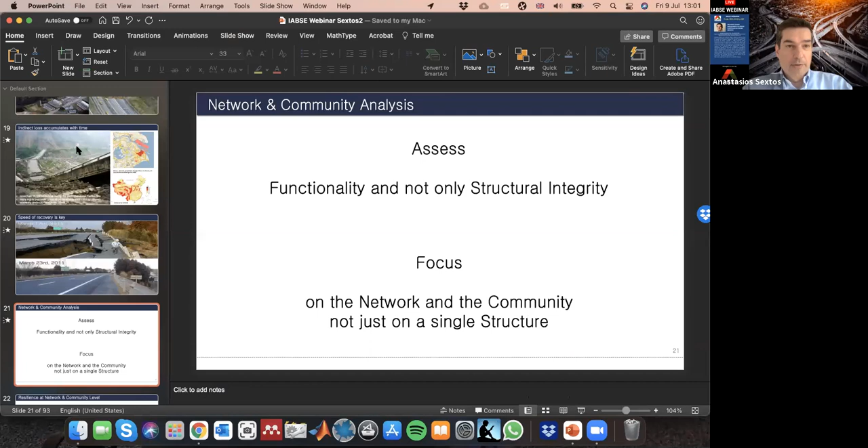So without further ado, after this introductory part, I will start sharing my screen and start sharing my thoughts about the topic we are about to discuss. But before I do so, I would like also to say a few words about the mission of the International Association of Bridge and Structural Engineering, which, as I said, is of course to organize this series of webinars, but that's not just that.

There are many other things organized by this very important international society, which aims to exchange knowledge and advance structural engineering knowledge around the world. This is done by bringing together people from academia, industry, the professional construction world, and the research sector. It's a very important association, bridging more than 2,500 members across 100 countries.

Most probably you're already aware of the very important Journal of Structural Engineering International, which welcomes papers from both academia and the professional structural engineering discipline. Feel free to go to the website and browse the content of this very important and interesting journal.

There are also other activities like national groups, task groups, focus groups, working groups and teams that work in different disciplines across materials, structural typologies, and other activities of bridge and structural engineering that are brought together in national group events and conferences. Of course, this was pre-COVID. Now we deal with webinars, but very soon we hope these things can continue in person so people can really discuss and interact with each other.

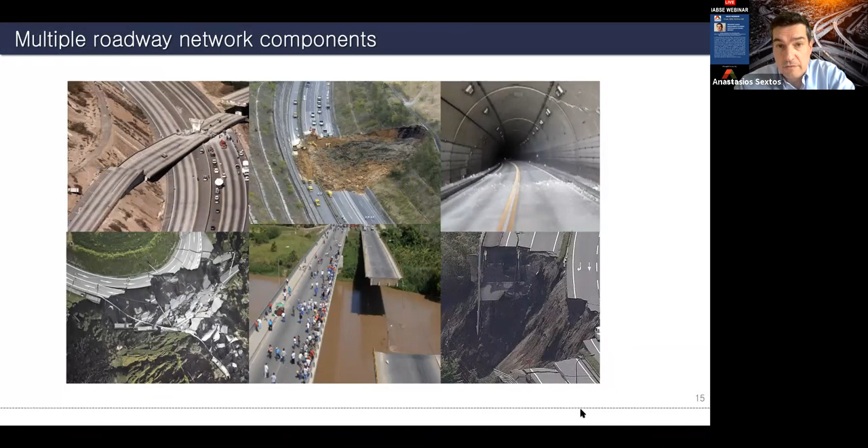Something else we know, based on previous experience, is that the direct loss of an earthquake can be very high, of the order of hundreds of billions, as the Fukushima earthquake has shown. But the indirect loss and cost of the earthquake can also be very, very high, even double in some cases. Because if the port is not working, if the airport is not accessible, if we cannot reach from point A to point B, if our services are down—like in New Zealand in Christchurch, where the whole downtown was out of operation for such a long period—then the cost is huge, and that's not directly related to structure or bridge damage.

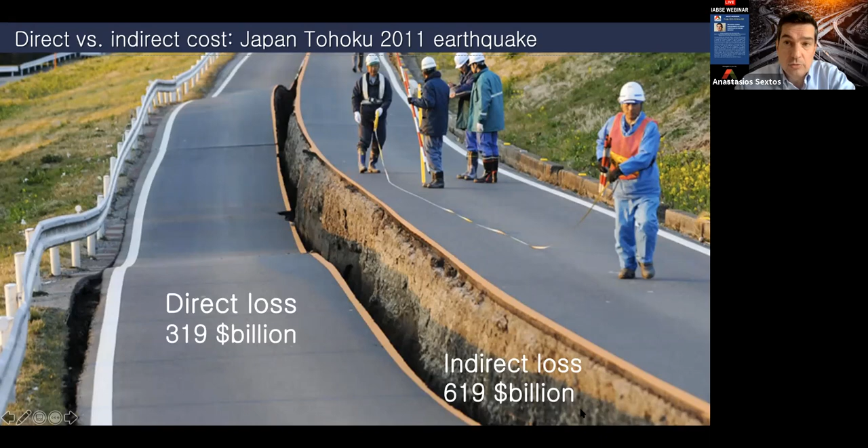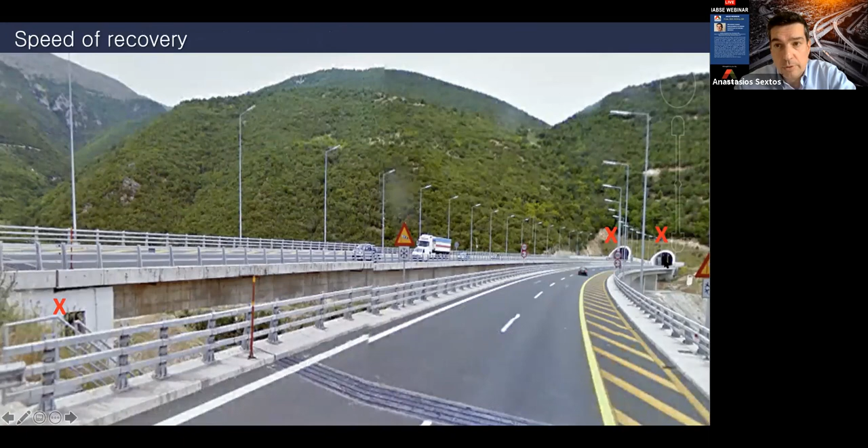Another thing we know is that the speed of recovery relates to the lack of functionality, but this is not really proportional to the extent of damage. The reason is that you can have a minor failure in the joint or at the entrance of a tunnel, and this is enough to take your bridge out, and actually the entire link of the highway, out of operation.

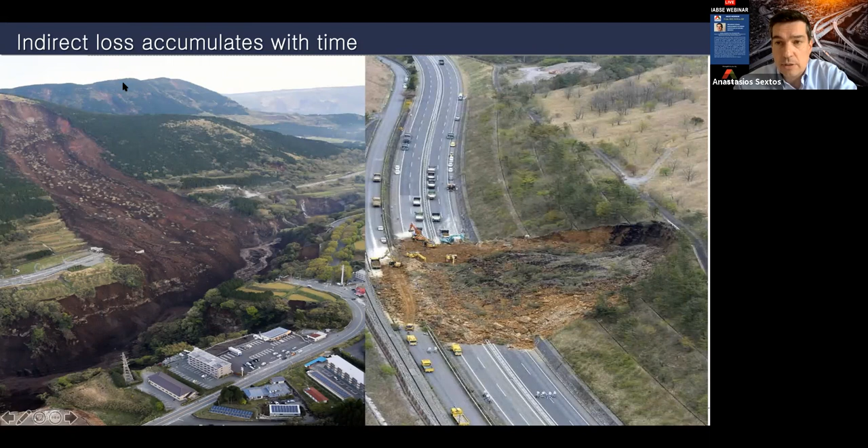Similarly, loss accumulates with time. Once the highway is interrupted, it can stay that way until it is repaired, and there is a huge cost in diverting traffic all around the area. For instance, there's a case where not only was there interruption of the highway, but the bridge also collapsed. So finding the closest bridge and doing the roundabout takes time, takes cost, and accumulates with time.

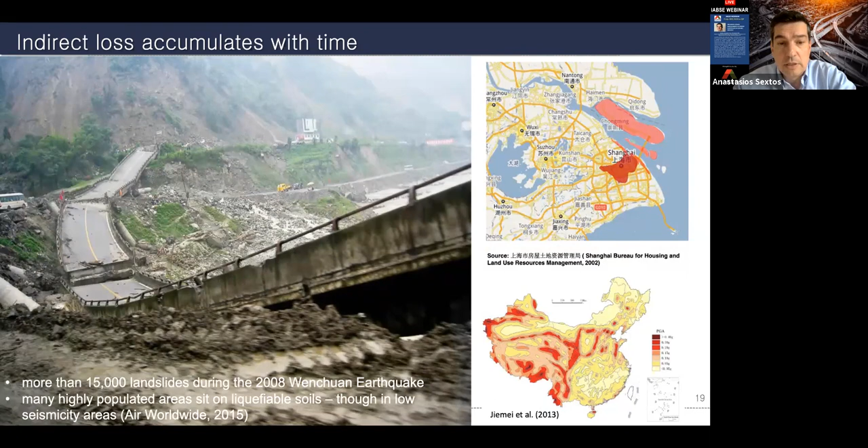Same thing happened in China, where landslides were actually triggered by earthquakes. That's a secondary effect of an earthquake, but high enough to trigger more than 15,000 landslides and create a very high loss. So recovery is key.

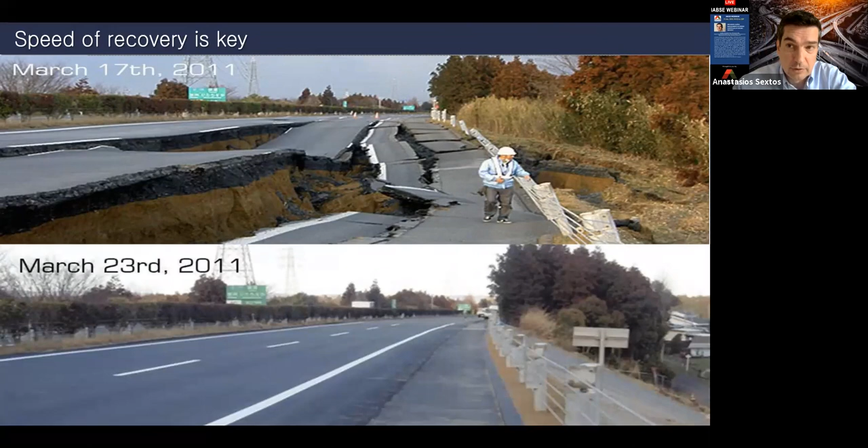Recovery can be quick, like we saw in Japan, where from the Fukushima earthquake on the 17th of March 2011, it took about a week to recover. But I can think of many countries where this would take way, way longer. So speed of recovery is very, very important.

Therefore, the purpose of this discussion is that we've now started thinking about and assessing the functionality of the system, not just the structural integrity—whether the bridge has damage or not. We also focus on the network and the community impact, not just the safety of a single structure. So in a few words, we're zooming out of the problem and revisiting the whole management of seismic risk.

And of course, this relates to resilience. Resilience, the most formal definition if you like, is the ability of a system to rebound, to restore functionality and social life after a major earthquake in the minimum time with a minimum cost. That's the definition that I personally like to use. There are many, many others.

Mathematically, this means that if your system was performing 100% before the event and then something happened, say an earthquake, your functionality dropped. Since then, it started recovering faster or slower. So how long it took to recover, and how deeply you failed such that it's harder to recover quickly, is really a very important question that needs to be answered.

And of course, how deeply, how extensively you fail is a function of aging, because if your bridge portfolio or components portfolio is old, sub-designed or substandard, this means the loss of functionality will be more significant.

Now, the challenges in doing so are several. First of all, how to quantify this? There are so many parameters that need to be quantified, because I'm personally very keen on defining resilience as much as possible based on numbers with a degree of uncertainty. And this is difficult because it relates to assessing social and financial impact that is not so easy to quantify. Structural damage is easier to quantify, and probably how long it's going to take to repair is easier to quantify too. Social and financial impact is not so easy.

And then we need to support informed decisions. So we need to calculate some numbers to help people make decisions, and engage with the professional community and stakeholders to make sure that our assessments, our numbers, our predictions are realistic enough.

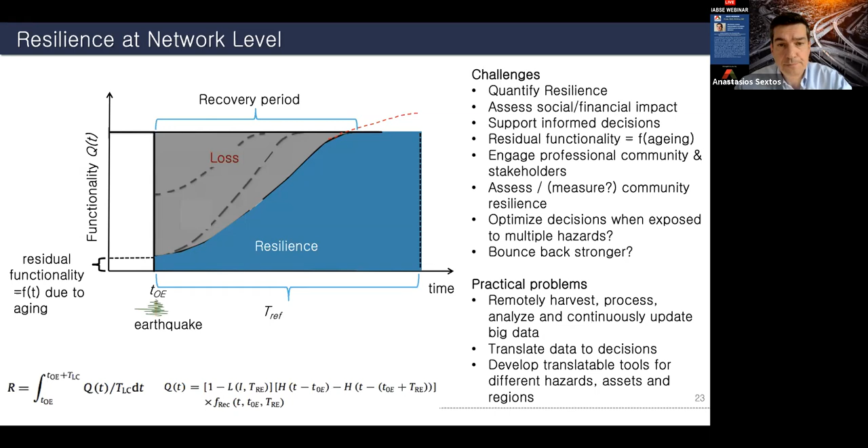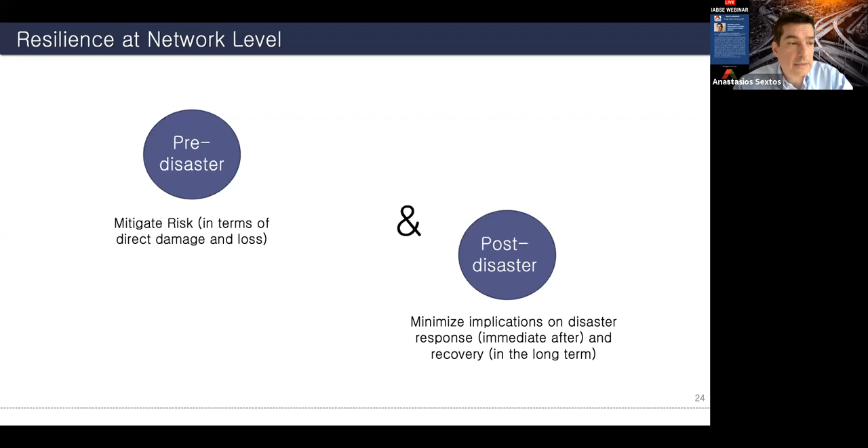With that, there are two ways to deal with it, two levels where we can intervene. One is before the earthquake event: we assess how much this risk is for the network level, and then try to do the best strengthening, or change our policies, before the event. Or after the event, which is post-disaster management, by minimizing the implications on disaster response and making our recovery schemes more successful.

Who cares about this? Of course, that's another question. Is this just an academic question, an opportunity to present slides in IABSE webinars and write papers? Well, that's not true, because we're talking about risk and loss, about funding, and this means somebody always has to pay the bill. So the entity that has the responsibility to bear the risk and pay the bill has to be interested in minimizing this risk and reducing this bill.

The state is one standard option in most countries - responsible for direct repair cost or indirect social cost. And maybe the highway stakeholders - in Central Europe we know many portfolios of structures and bridges are privately owned and maintained. So this is the entity that has the risk.

The insurance cares, because that's how premium is defined. And also the entities that pay the premium care, because they don't want to pay such a high premium. So this is a huge discussion. Therefore, quantification of seismic risk is so important.

That's about pretty much what I'm going to present to you. So instead of just showing a methodology that we have developed, I'm going to show you directly the results of a case study, so that through these results we can understand how our methodology is working. It's not the only methodology - there are other ways to deal with things - this is just to inspire you mainly.

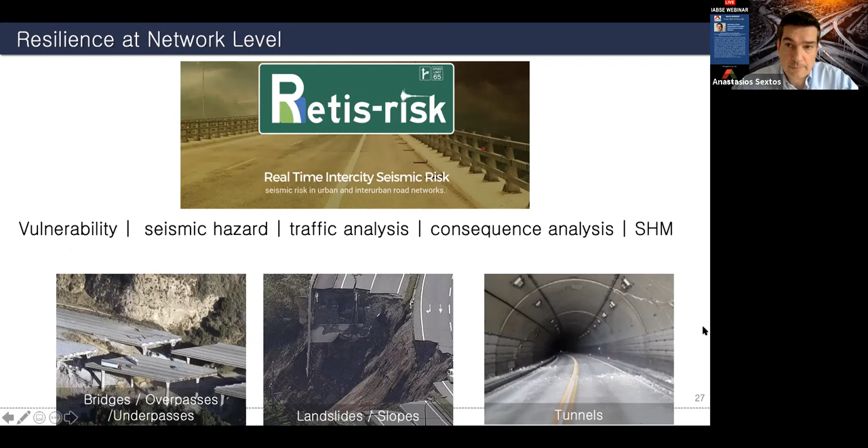But this particular methodology has been defined through a research project entitled RETIS-Risk, real-time seismic risk, and it deals with the convolution of vulnerability, hazard, traffic analysis, consequence analysis, and structural health monitoring, considering multiple components of the network system.

I'm going to take you virtually into Southern Europe, Southeastern Europe, and in Greece in particular, where we'll be dealing with a highway in the north of Greece called the Egnatia Highway. The interest about this highway is that it's a former Roman path, if you like, that has a number of bridges. That's a snapshot of the Roman path.

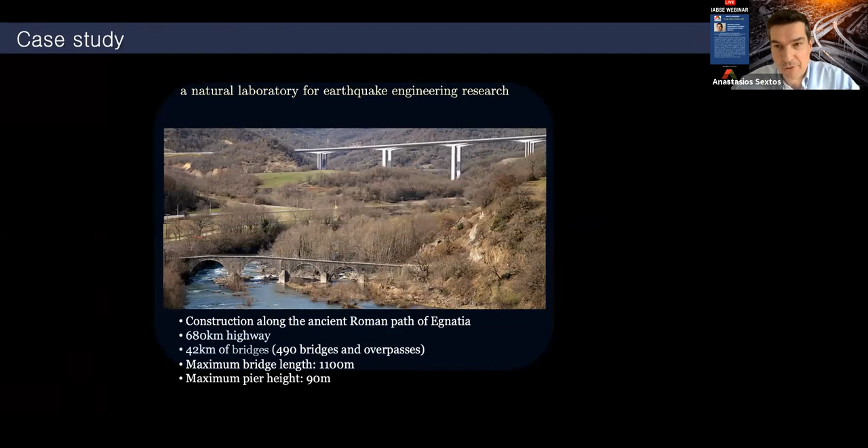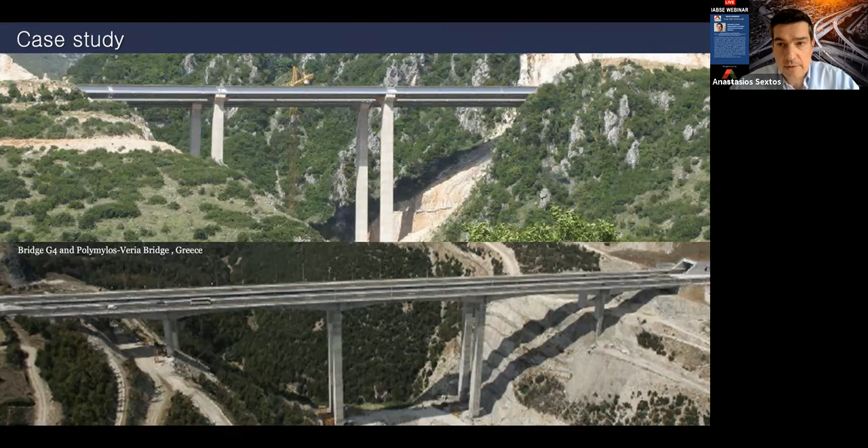That's how the bridges look. It's not always so close, the ancient and the modern path, but it's a nice photo, that's why I tend to use it. The importance of this comment is that there are many important structures in an unfavorable topographic environment, quite exposed to seismic hazard. The design PGA in the region is between 0.16G to 0.24G, so that's not negligible.

Challenging structures, and this is where we try to apply our methodology first. So I will be talking about the methodology and the case study and the software we developed all in one, so we see the example directly as we speak.

But in essence, the methodology effectively splits different stages of things that need to be convoluted. First, we need to map the network in terms of its topology, the structural portfolios we've got, the other components we have, what types of structures exist, where they exist, and how they interact with the traffic within the network.

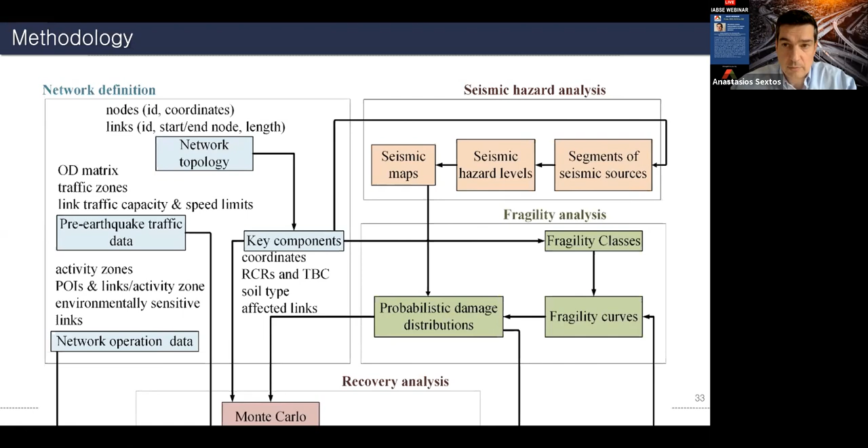We have to map and quantify seismic hazard, and then map and quantify vulnerability and fragility of our systems. And then we have to work with traffic analysis and see if one of the structures fails with some probability, what's going to happen, how this traffic is going to be diverted, and how long will it take to recover, and so forth.

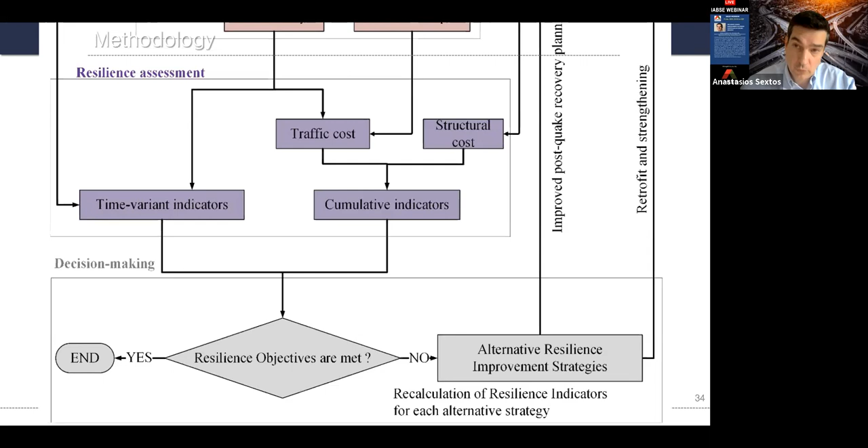So we set some resilience objectives from the beginning, assuming that we are the stakeholders of this entity. We say that, okay, in case of an earthquake with a 475 year return period, we will not accept the highway to lose functionality by more than 10% for more than 15 days. I'm giving you an example of a resilience objective. That's not a loss objective, how much it's going to cost to recover. It's a resilience objective: how long it's going to take, how much it's going to cost, and what it will take to restore full functionality.

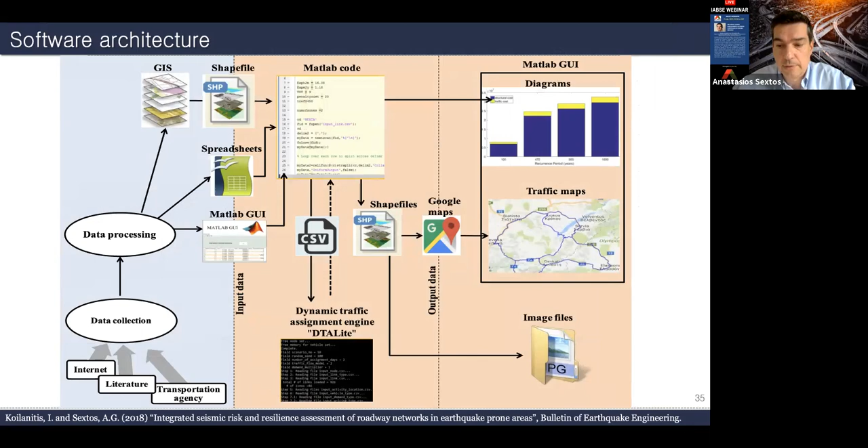That's a software we have developed, basically an integration of GIS and MATLAB that runs all the Monte Carlo simulations. This is how, for example, we would split a highway network area into different components like highways, roads, bridges, tunnels, slopes, and other joints, main cities, points of interest, things with higher impact. If you have a very important industry in the region, it gets a very high weighting factor to retain its accessibility, for instance.

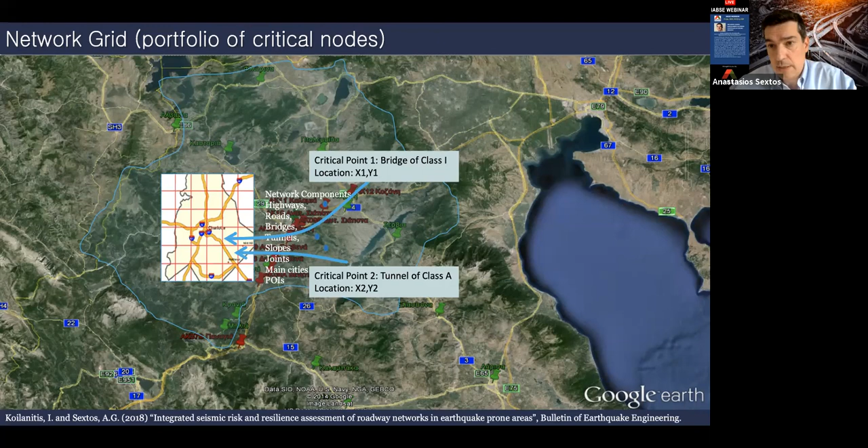And then these critical components are split into joints. These joints are points on the map indicating that they can interrupt traffic within the network. That's the purpose of these critical components, critical nodes in the system.

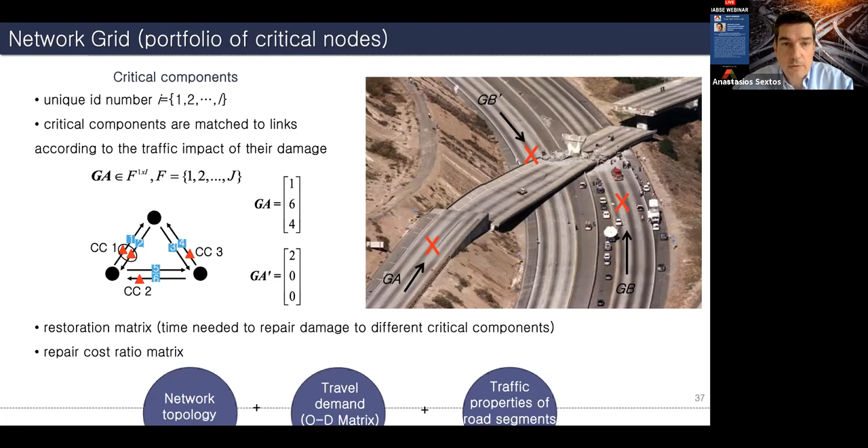We also integrate the travel demand origin destination matrix. So clearly the stakeholder of the highway knows what is the standard traffic on standard days, going from point A to point B and from point B to point C in a matrix, or at least the average values. This is also imported into the system.

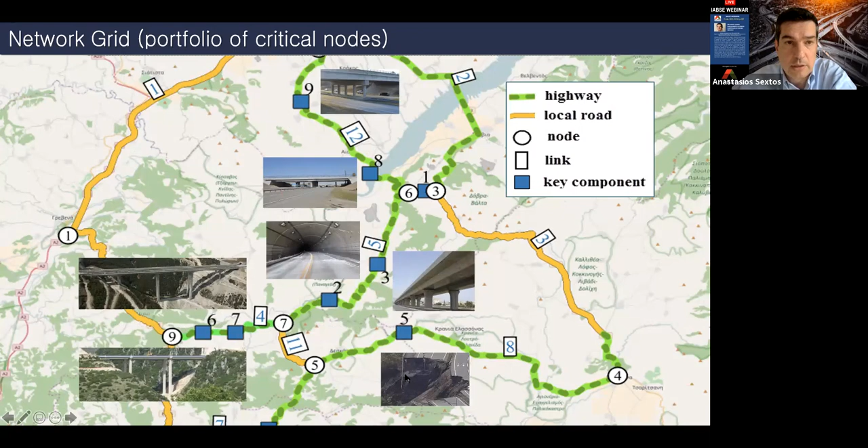This is pretty much how it looks like. You've got the traffic, you've got the GIS map of the highway. That's the simplest version of the example I'm telling you so we can understand a little bit better. Bridges are mapped and classified, tunnels the same, and everything else, slopes that can probably pose a threat to the functionality of the network. That's how it pretty much looks like.

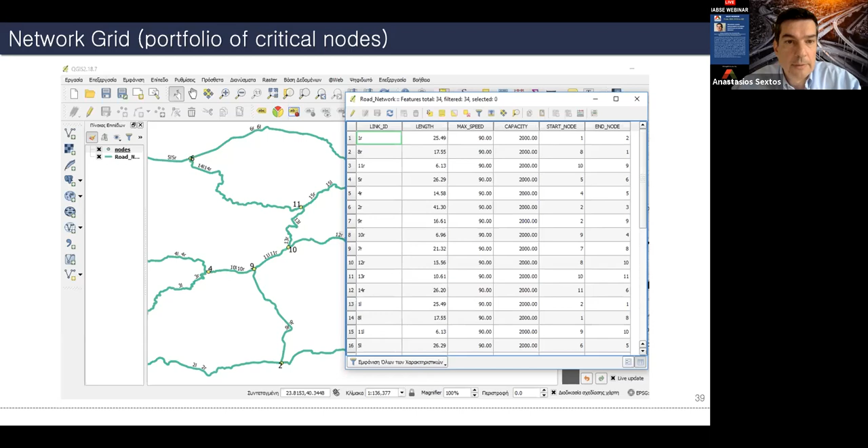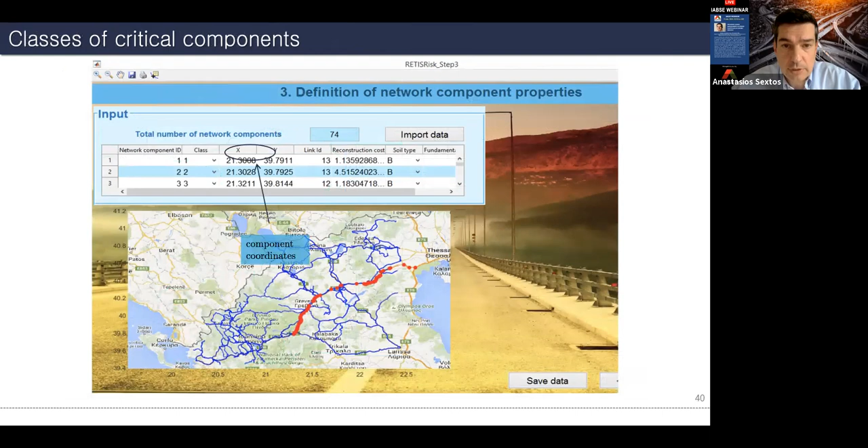I have to say that all the software runs with freewares. We are not using any professional software. It's using QGIS, but it can be integrated with ArcGIS, for instance. And then, of course, we need to define the networks of the map. That's how we can see them through the system, where they are, what is their class, what is their coordinates, reconstruction cost, soil type, fundamental period that we're going to use later on, and so forth.

We also need to define seismic hazard. Seismic hazard in this case is tricky because it is not the convolution of the probability of experiencing an intensity measure due to exposure to different faults at a single point. We are effectively talking about the spatial distribution of the intensity because of a single rupture every time. It has to be scenario-based because for a different location and a different fault that is rupturing, there is a different distribution of seismic intensity and therefore different probability of different bridges and components to fail.

So every rupture has to be dealt with separately, for different annual exceedance rates that can be applied in different rounds of analysis for different seismic faults and also for different segments of a fault, because a fault has a length of kilometers. Whether you're in one part of the fault or the other would make a big difference if there's a bridge around. So we're working on a scenario basis, and then everything is integrated in a Monte Carlo scheme at the end.

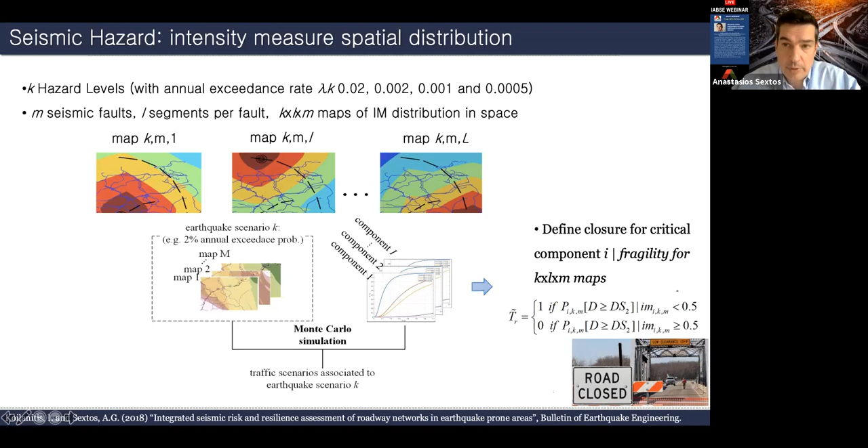So you can see that we generate a number of maps of spatial distribution of seismic intensity for different hazard levels, for different seismic faults, to predict the failure of different structural components, and we end up with the probability of each bridge closing for a given event.

Once we do this, or in order to do this, we need to know the seismic fragility of the bridges. Seismic fragility, in short, for those not very familiar, is the result of a very detailed nonlinear structural analysis under earthquake loading that will give something like the figure on the right, which is a probability to exceed a certain damage state, let's say minor damage, moderate damage, high damage, collapse, versus an intensity measure of the earthquake, such as PGA, spectral acceleration, or some other more complicated intensity measures. And by knowing this probability, we integrate that into the system.

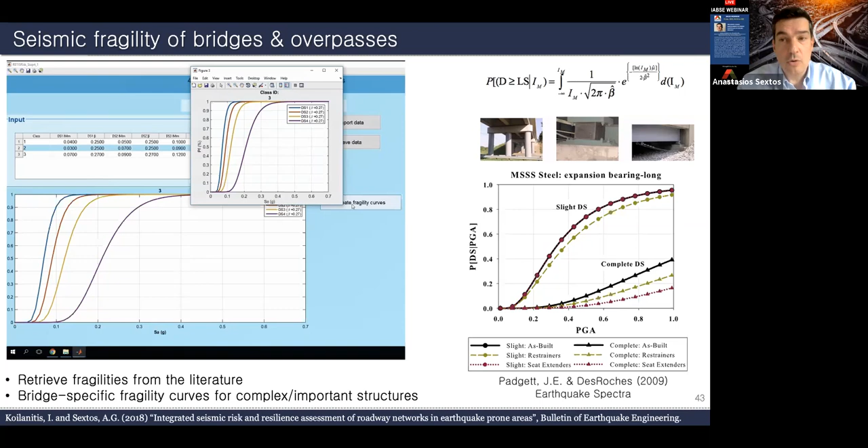So we classify all bridges that have the same structural typology, therefore the same fragility, and given the location they are in the map and the intensity at this specific location, the system returns back for every analysis of the Monte Carlo scheme the probability for this bridge to have minor damage, therefore closed for X number of days, or moderate damage, therefore closed for Y number of days, and so forth.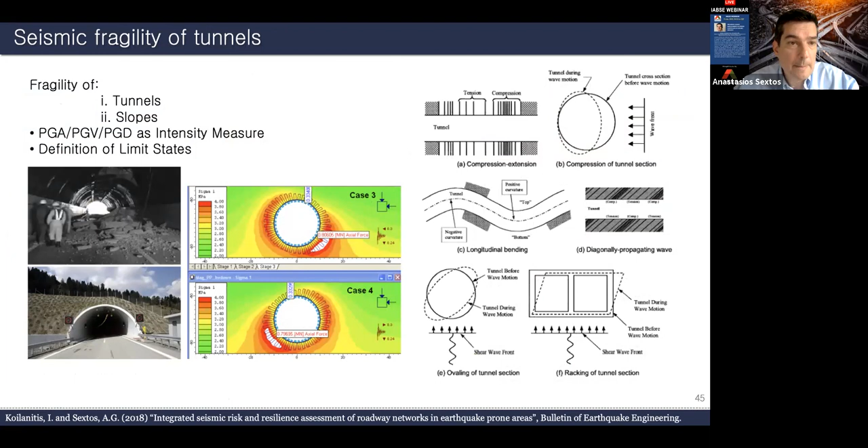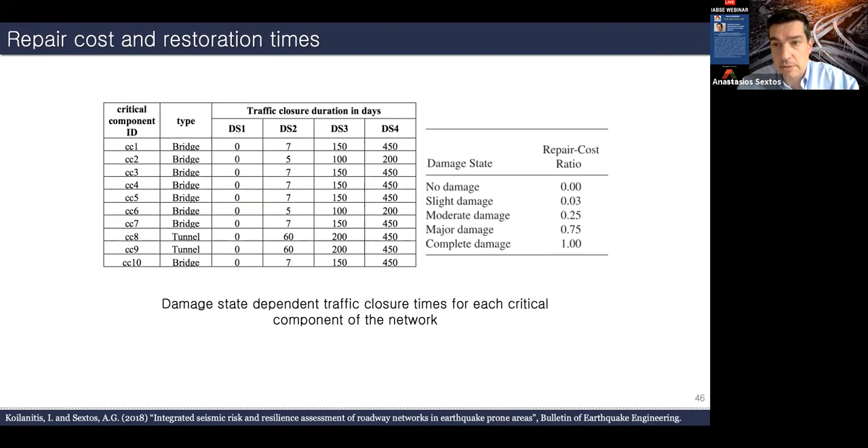But there are fragility curves for that, and we have introduced them into the system. And then, of course, the software would like to know how long it's going to close each structural typology if it experiences a certain degree of damage. That's also information that's in the system.

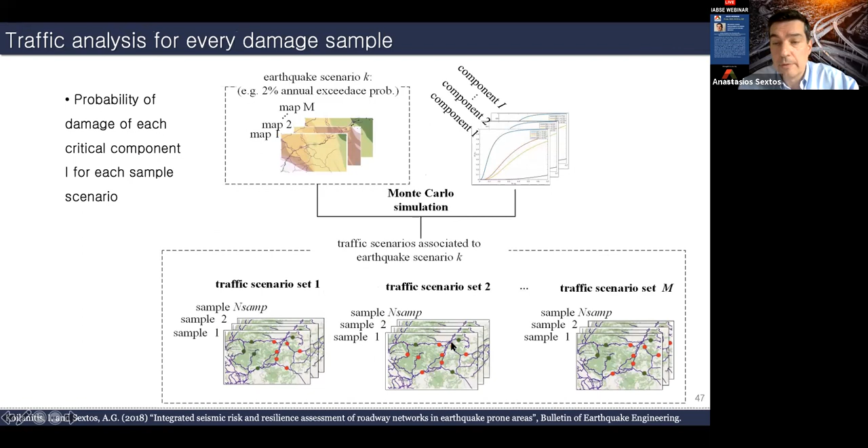And then Monte Carlo analysis will convolute everything with everything in a repetition of analyses, as you can see, different traffic scenarios, different maps, different cases of structures that close the highway, and so forth. This, therefore, will lead to the traffic analysis, because once, for one scenario, two bridges are closed, then there is another software that takes care of the redistribution of the traffic load and calculates the extra time needed for people to drive around and take another alternative route.

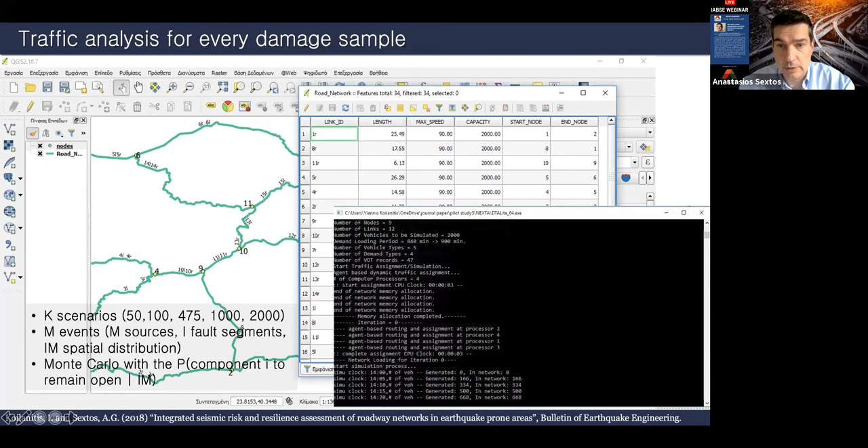So this is something that is repeated multiple times, again and again, and it's also repeated for recovery phases. Because once there is the initial state of damage, then given the repair rates and the duration per damage, per structure, per scenario, we end up with a virtual time that is running, and after 3 days, 1 bridge opens, so we need to rerun the state of the other bridges and the redistribution of the traffic scenario, and so forth. At some point, which is when we end up with full functionality, everything is green again.

But until that, for every stage, we need to repeat the redistribution of the traffic and accumulate all this cost. So this cost, of course, comes from defining an importance function per different highway link based on how much traffic they were carrying before the earthquake. And then we calculate the repair cost ratio index to accumulate how much it costs to repair these bridges depending on the damage state.

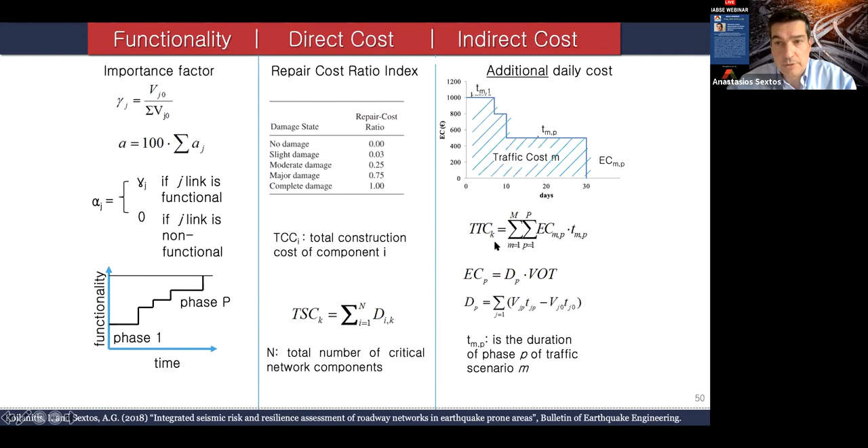And of course, how much is the extra traffic cost because people need to drive further, drive for longer, and so forth. And that gives us the final result, or the final prediction, if we do that before the earthquake, which effectively is explaining the following.

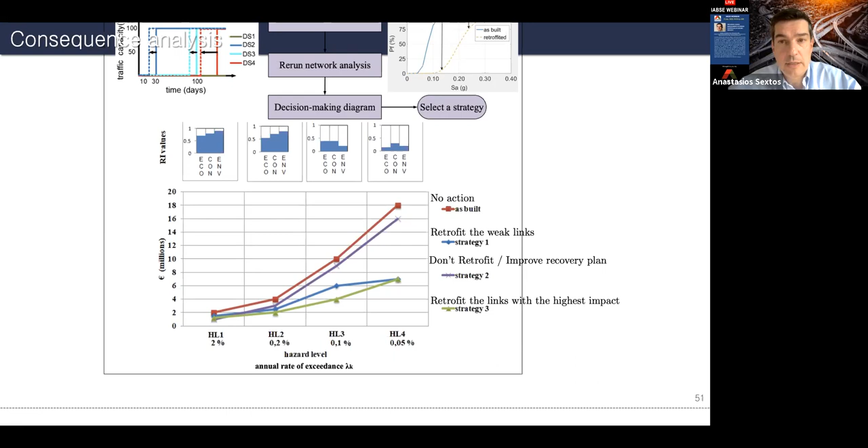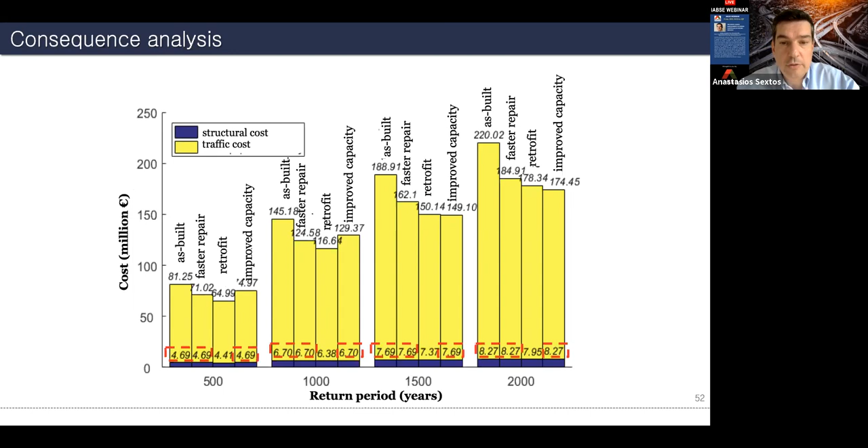And one of the things that we need to answer is, if we know these numbers in advance, would it be better to retrofit now, or do we just play dumb, do nothing, and wait for the main earthquake to happen, if it happens?

This is what I think our comprehensive approach answers, because the stakeholder might take the risk either to do nothing and retrofit nothing, or if it's obvious there's going to be a very high loss of functionality and cost down the road of the life cycle of the network, it's much better to pay now, let's say 10%, compared to the total risk of paying 10 times higher cost if a major earthquake happens. This depends on the properties of the portfolio. If there are many old bridges in the system, it's way better to invest money now to retrofit, and of course retrofit the ones with the highest resilience impact, not just the weak ones, instead of waiting for an earthquake to happen.

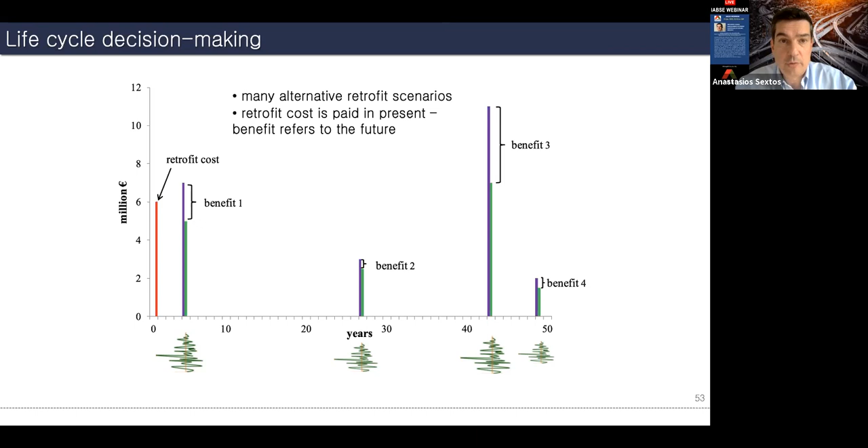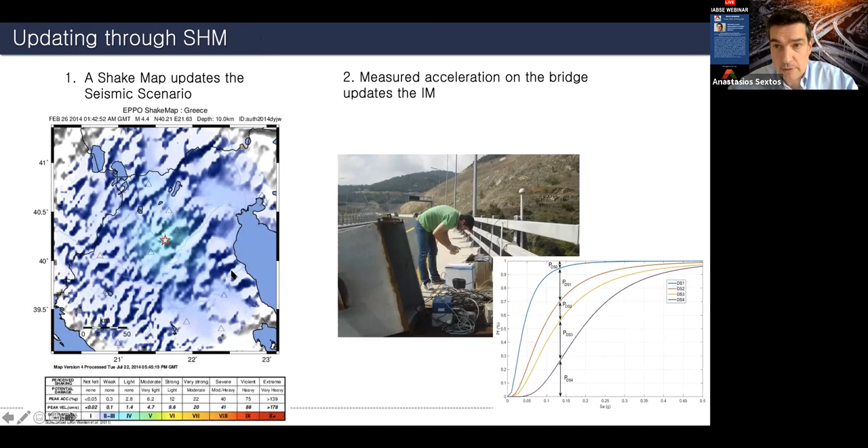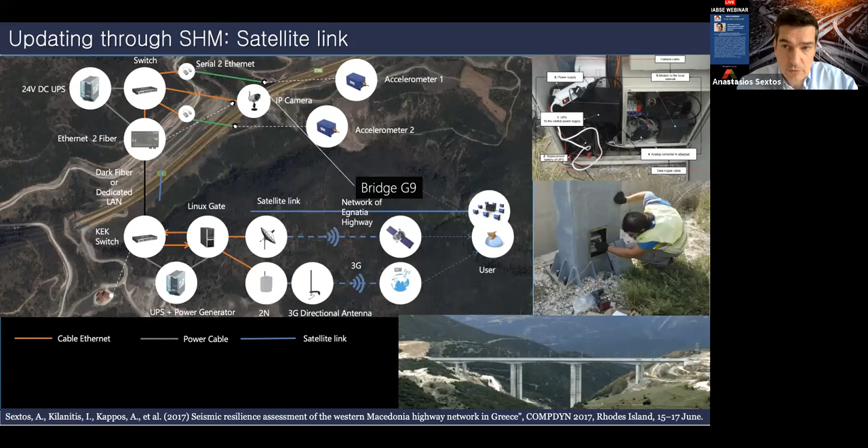Final thing I want to show before some uncertainties of the system is that we have improved this by introducing structural health monitoring in some of the bridges, because right after an earthquake we have a shake map, reducing the uncertainty to zero about the seismic intensity in the system, since we know that in about 5 minutes. Also, by introducing a satellite link—why satellite? Because typically after an earthquake standard GSM connections may not be working, so that provides redundancy. Through that we get structural response and measurements from the bridge, on the bridge, next to the bridge, free field measurements and on-structure measurements, giving information about the intensity the structure experienced.

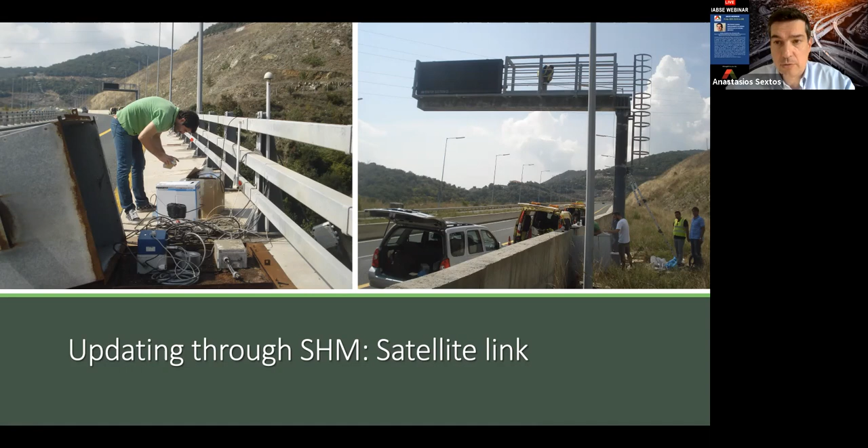With that in hand, because we know the intensity and the spectral intensity the structure experienced, we can very quickly after an earthquake predict if there is damage and if it's worth checking this bridge versus another, simply with our stakeholders using the satellite connection before going to check the bridges on site. Now, a few uncertainties I'm going to share.

I'm not going to go into the mathematical detail. You'll see some equations, but I'll skip those—only physically, I'm going to share some information with you.

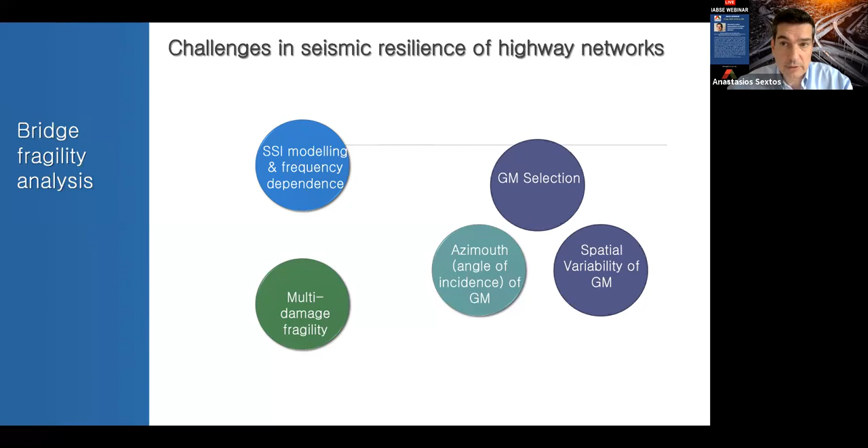The second thing I'll share is a series of uncertainties I'll present qualitatively, because we're talking about loss based on probability of failure, and this probability of failure depends on fragility of the system, which requires very detailed analysis. There are some very important uncertainties in the analysis of the system.

One: what is the stiffness of the abutment embankment system? This defines the boundary conditions of the very system we are solving. I won't get into full detail, but it's key to understand that the gap we've got, ratcheting effects, nonlinear response of the abutment, amplification at the abutment level—these amplify and entirely change both the dynamic properties of the system and the input that goes into it.

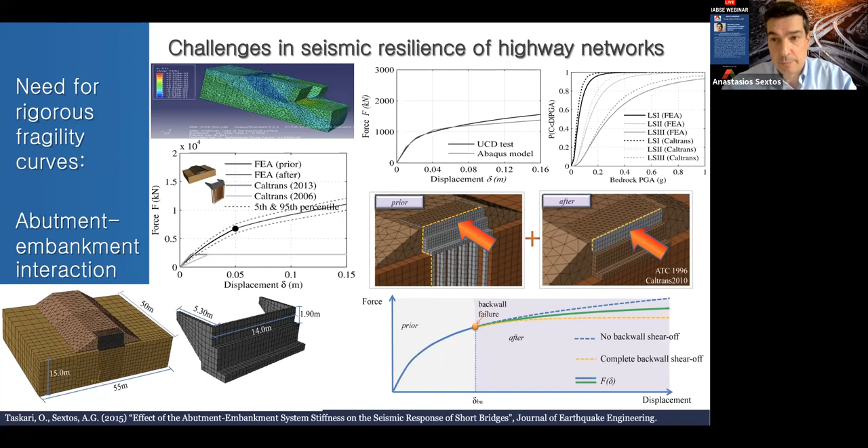One major uncertainty. The second major uncertainty is that soil structure interaction is not just a spring—needless to say, certainly not a fixity at the base of our structure. So we have developed systems, which you can refer to in the presentations, where we introduce a series of lumped parameter models, combining springs and dashpots optimized to mimic the impedance function of soil structure interaction, so that at least the frequency dependence of soil structure interaction is accounted for in an analysis in the time domain. This is really very important to account for.

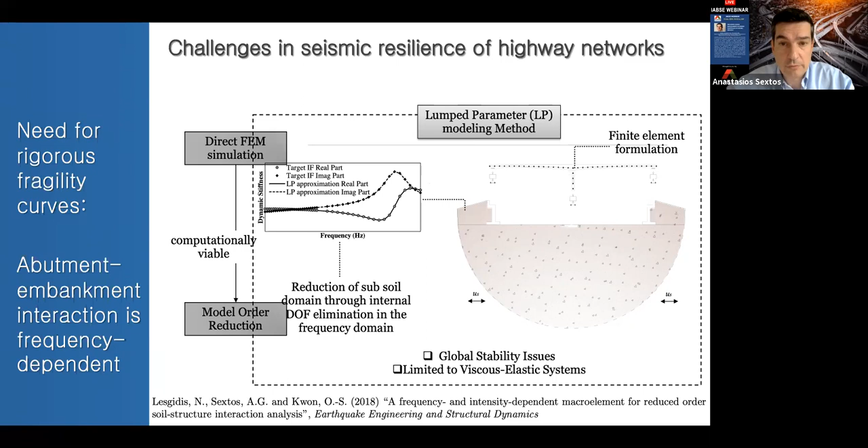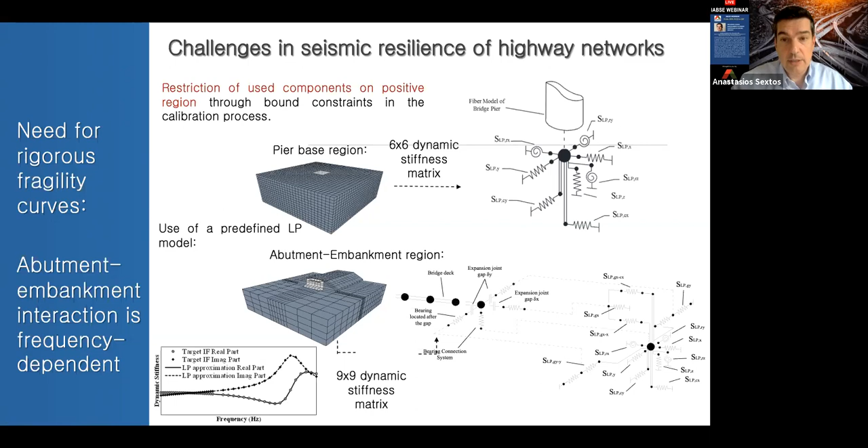We can see an example here. If we were to model such a complicated 3D pier-foundation system or abutment-embankment-subsoil system, this is effectively replicated with a series of springs and dashpots that follow the impedance function and provide the frequency dependence in damping in particular, because different properties of the system and the earthquake lead to different soil structure interaction damping, and this changes the results of the system a lot. That's how our finite element model would look. We also have software for that, so springs and dashpots can be implemented very easily—this is something people can use in practice.

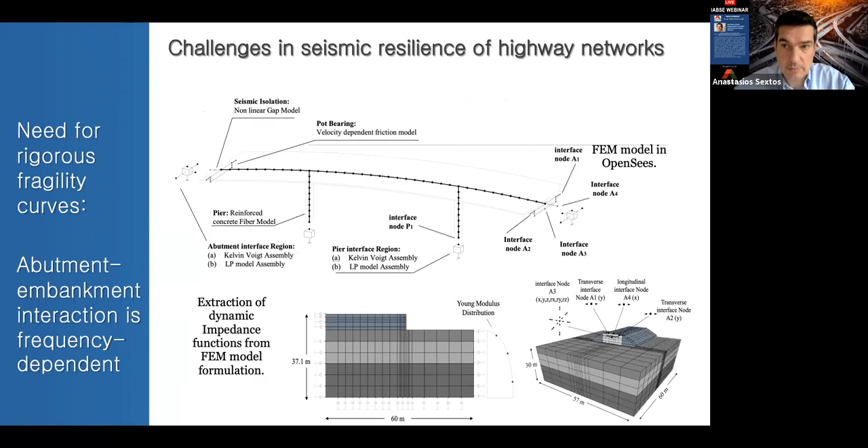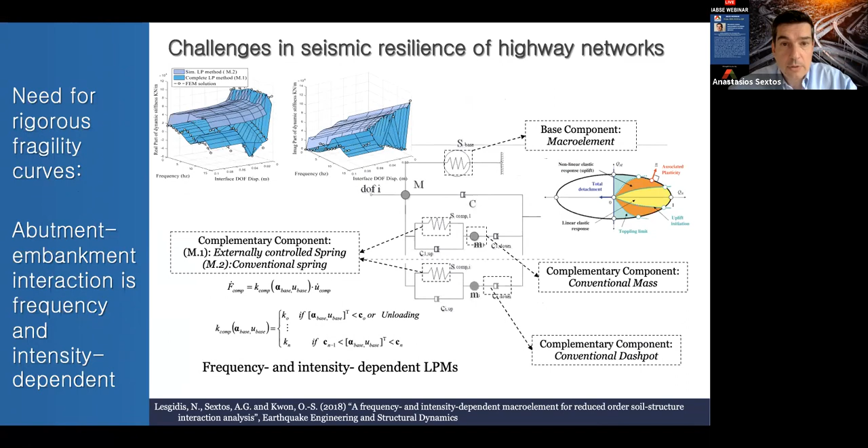We have also introduced a plasticity model into the system, so that we take into consideration that when the soil response is nonlinear, this frequency dependence is further modified, and that can be captured as accurately as possible. With this analytical formulation, we're able to capture very well with springs and dashpots something that normally would need a large soil domain and a very heavy finite element model.

Talking about fragility analysis, this requires introduction of uncertainty, and repetition of thousands of analyses. So it makes a great difference if we can reduce the computational cost with a very accurate yet very computationally effective set of springs and dashpots.

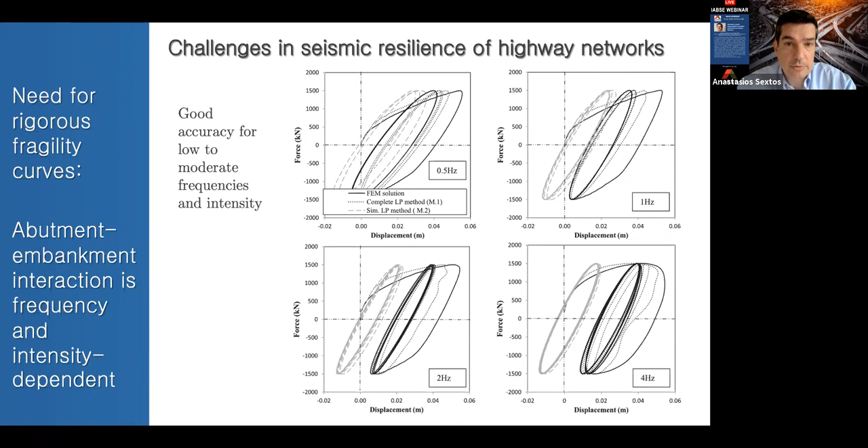In some other cases, for different damage states, it can even be 100%. So we are predicting collapse. We're working to calculate the loss of a system, and we have lost 100% of accuracy because we forgot to include, or didn't include properly, one important physical aspect. That's my degree of warning here in my analysis, that I zoomed in a lot initially, saying okay, everything has to be zoomed out, we need to integrate numbers, we need to quantify. But at the same time, for things that have a disproportionate effect on what we calculate, we should actually do them properly.

A similar type of issue is the fact that fragility or damage has multiple forms, and it's multi-angle. Because when we have a bridge failing during an earthquake, we can have shear damage of the piers, flexural damage of the piers, we can have the abutment bearings failing, we can have the abutments tilting, we can have pounding, probably foundation problems. There are many, many different types of damage.

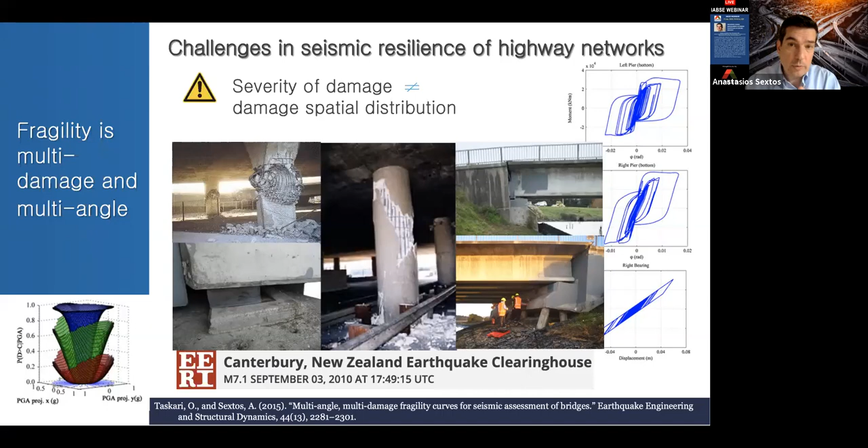So depending on what damage mode we're looking at, clearly the angle of the principal component of the ground motion, which is really random and we don't know in advance, can play a major role. So we have to account for randomness in the angle of incidence. We have to account for different damage modes before we end up with a fragility and an estimate of how long it's going to take to recover from a degree of damage.

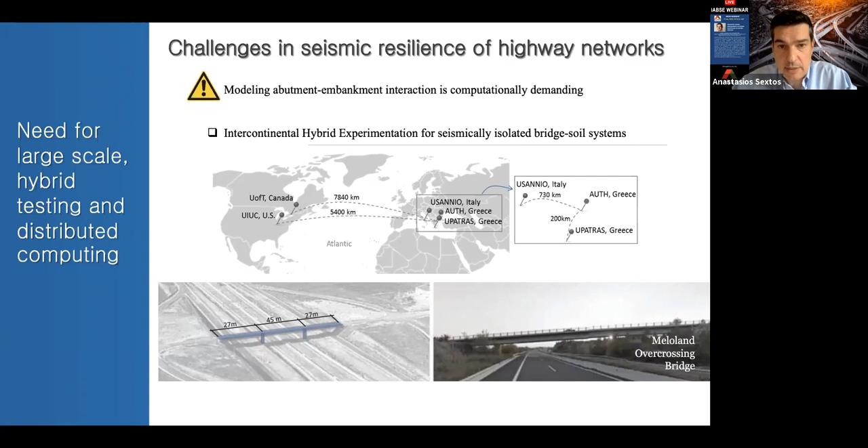That's also a set of slides that relate to the need for doing large-scale testing, because we are relying very much on numerical analysis. For some important structures, particularly substandard structures and old bridges, it is very important that we have the ability to use experimental data. So I'm going to give you an example of how we have performed hybrid testing.

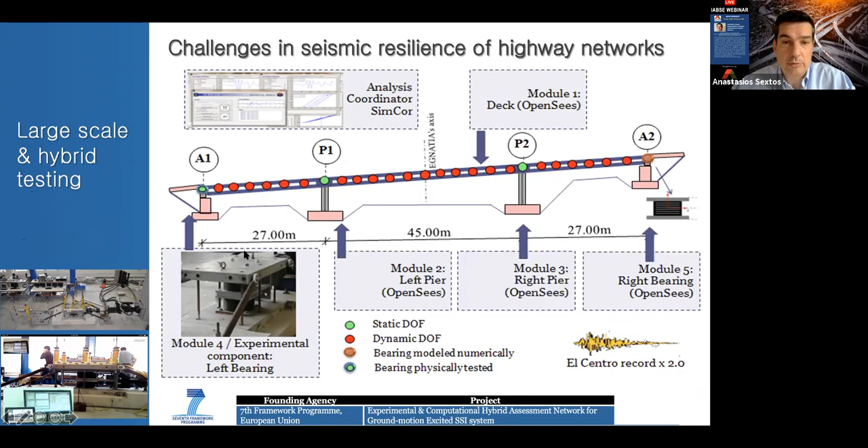Why I refer to hybrid testing, not just component testing, is because this gives us the opportunity to run the system as a whole by substructuring into numerical components run on several computers, or in several different countries in this case, and some critical elements that are rate-dependent which we would like to test experimentally, simultaneously.

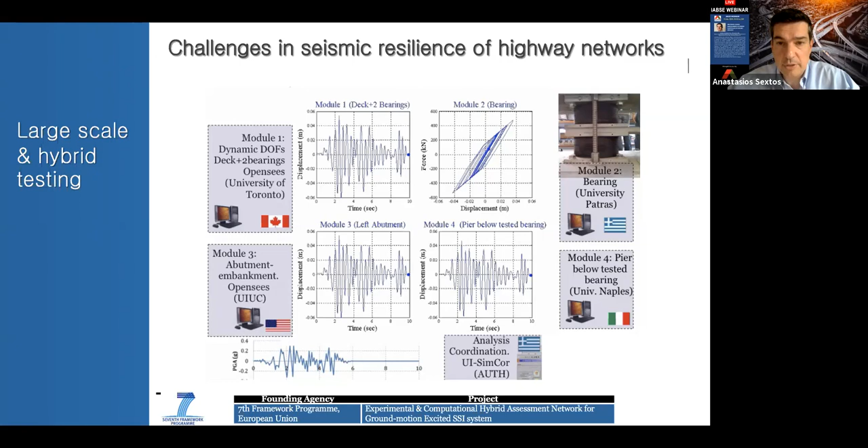Things that we can't model, we test. Integral abutments, for instance, soil-structure interaction, pounding, impact on stoppers, nonlinear response of substandard bridges, and so forth. Testing, testing, and testing is very, very important. Talking about testing, that's another example of a project we ran at the University of Bristol.

This is just to show you things that can be done at scale, combining soil-structure interaction on systems that include the soil and the bridge on the shaking table, so we can shake them and measure what's happening behind the wall.

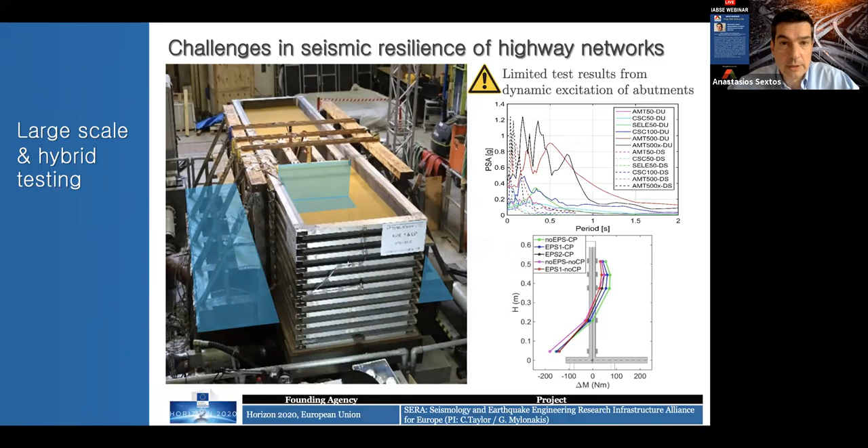Currently we have a much larger test at the new lab at the University of Bristol, where we'll be measuring within a soil pit of a large dimension, about the size of a room, what the passive pressures would be in the system during loading. This is also something I've discussed previously about multiple angles and multiple damages, implementing the stiffness and damping properties we have accounted for experimentally.

These are all very important aspects, and something I'd like to share with you ahead of recent work we've just accomplished: when you couple experimental and numerical work, multiple damages, multiple angles of incidence, different properties, and uncertainty in all elements of the bridge's response under earthquake loading, and convert everything to money, to loss, to cost, you'll see that these results not only differ depending on the angle of earthquake motion, but the stronger the earthquake is, this tends to disappear.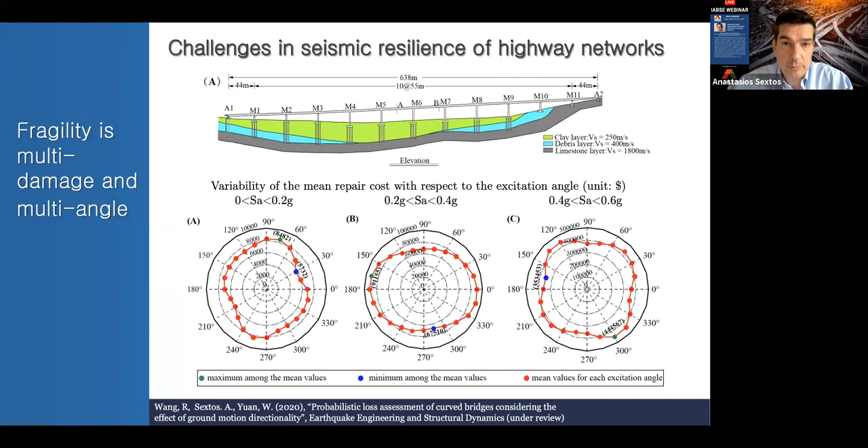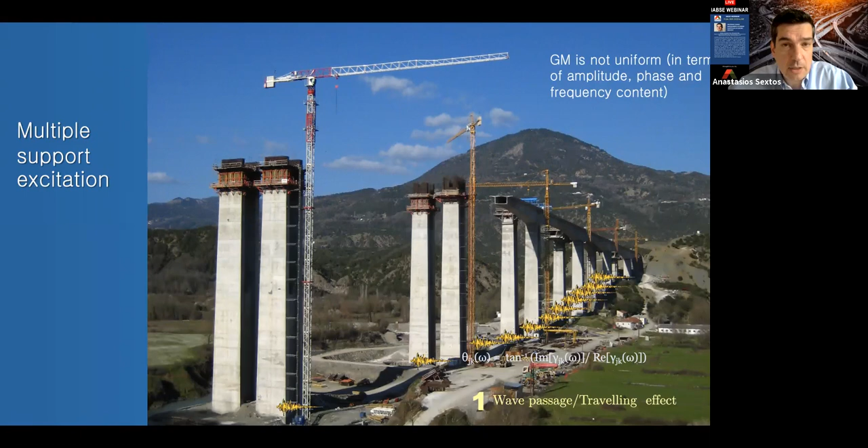And these are some further examples. A final thing to keep in mind when talking about bridges is that ground motion across the bridge is not the same. That's easy to understand, because ground motion naturally changes in amplitude, phase, and frequency content, simply because waves travel and meet different soil profiles, and they reflect, refract, and are superimposed. The difficulty is how to calculate that and take it into consideration in a design or assessment process.

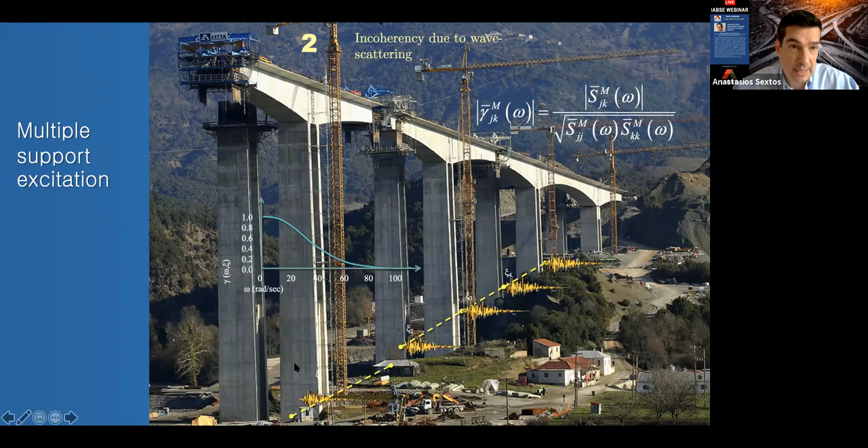As we see in this slide, the seismic motion loses its coherence, its statistical correlation, from one point to another. This curve shows that the coherency of motion drops with frequency and with distance. Similarly, different soil conditions or site effects—1D, 2D, 3D, topographic effects, and so forth—lead to ground motion that differs from one point of the bridge to another. Crossing a liquefiable soil profile is the same.

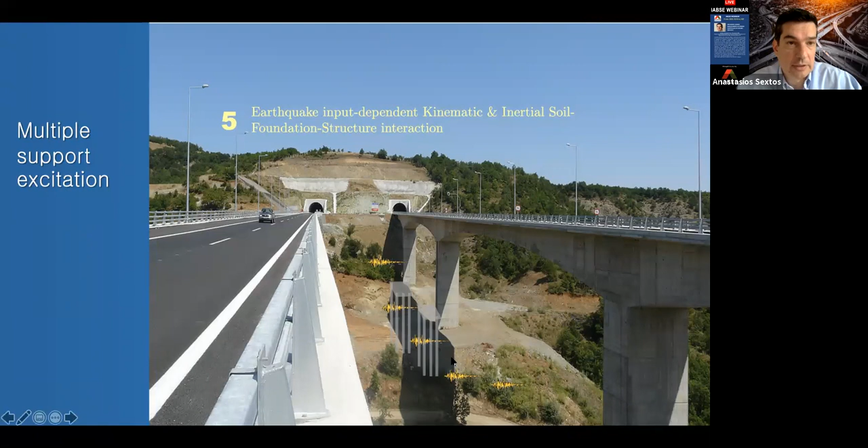You have significant soil-structure interaction within some of your piers as well, because soil-structure interaction changes the frequency content and phase of the ground motion wherever the soil is substantially different and softer. Therefore, all that combined leads to cases where the ground motion at one location of the bridge and at another location is not just delayed in time—it is very, very different.

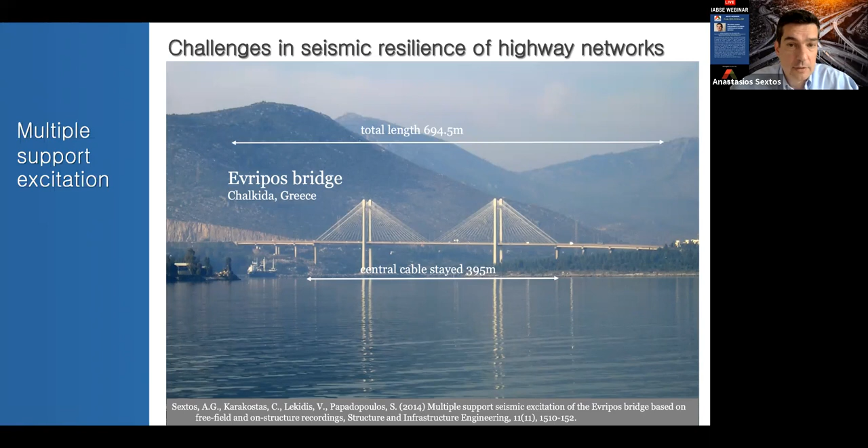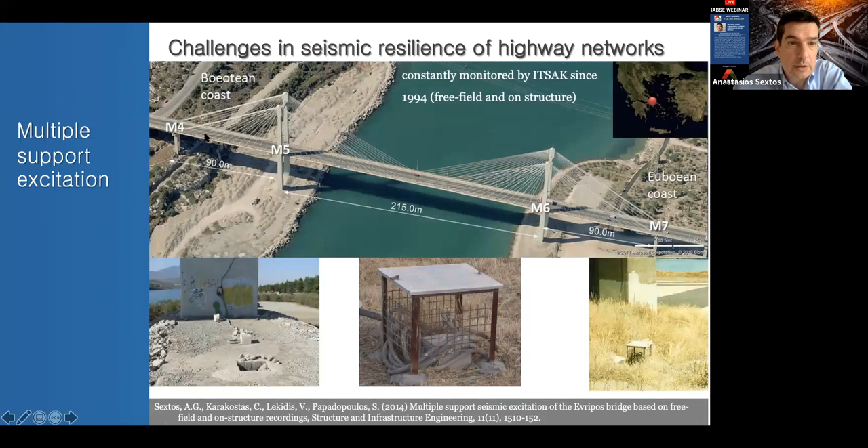That's an example of the Evripos bridge in Greece, where this was measured by accelerometers that recorded the Athens earthquake on the bridge and around it, in free field conditions. You can see how ground motion can be very different if you compare one recording with another—very, very different. And if you look at the phase properties and frequency content, those are also different.

So when we are actually assessing the fragility of a bridge—if the bridge is long enough, if it's on strange topographic conditions, if it rests on soil profiles that are either very soft or change a lot along its length—then this has to be taken into consideration.

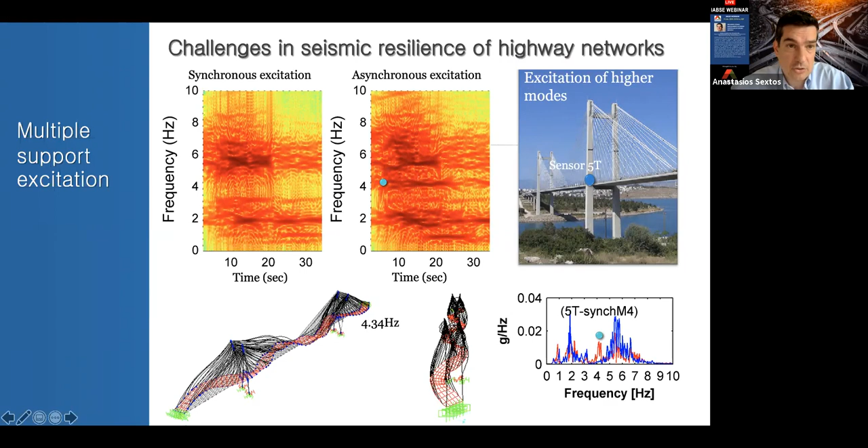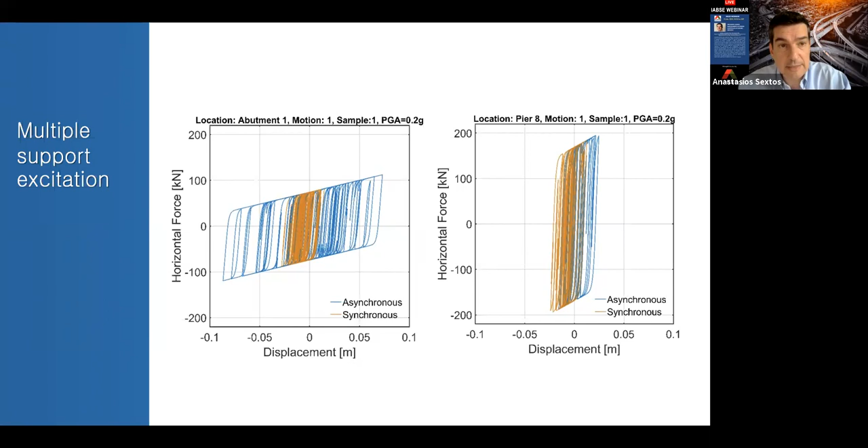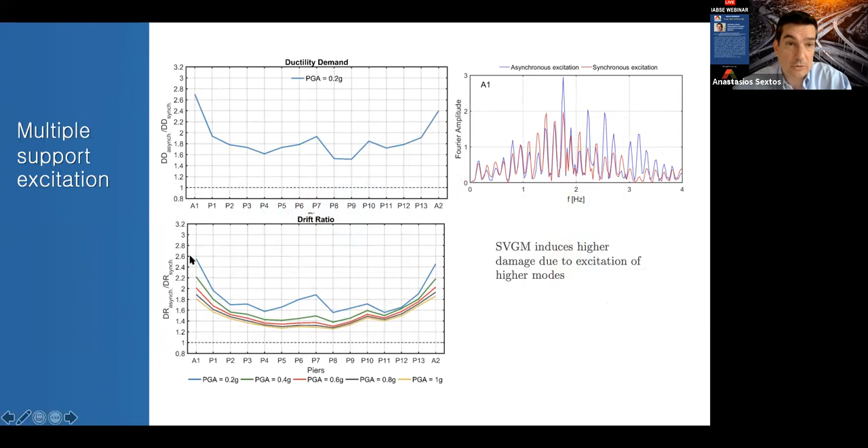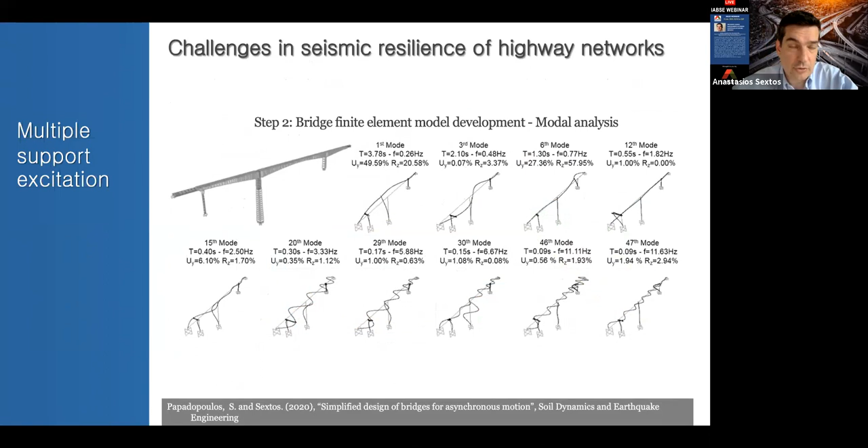So talking about probability of damage, that's also something we have to take into consideration. With this, I'm going to walk you through a couple of slides to finish. This procedure is now one of the solutions given in the new version of the Eurocode coming soon. There's now a procedure to calculate what higher modes are going to be excited and how they affect specific structural components, and therefore how we can amplify some design quantities safely without doing much in terms of predicting the variability of the ground motion. So it's kind of an offer to the designer to get away with a simple calculation that actually captures some of the detrimental aspects of spatial variability.

With that, I would like to conclude by saying that yes, quantification of seismic risk, seismic damage, seismic fragility, seismic resilience is very important. But when talking about bridges, we also have to be rigorous, and obviously this degree of accuracy is a function of the importance of the bridge.

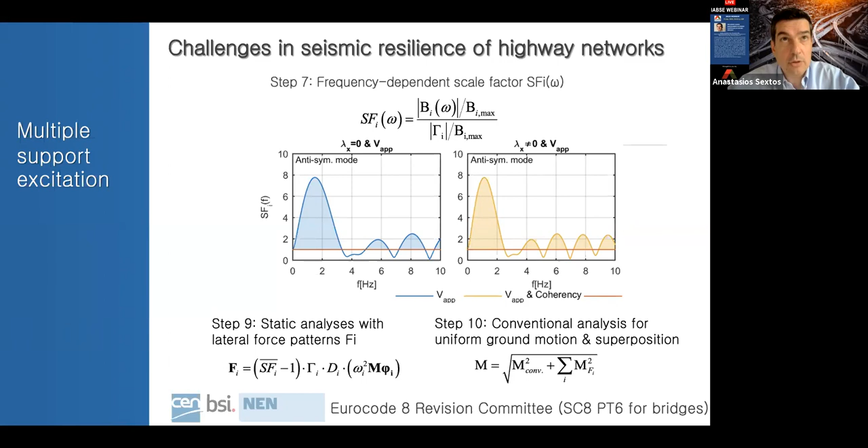To close with a couple of conclusions, or some thoughts: yes, in my opinion, resilience can be quantified, but we have to balance rigor. We are very, very rigorous in terms of seismic hazard, not very rigorous in terms of geotechnical and structural modeling. So this has an effect and can be addressed.

Community resilience is a multidisciplinary, multi-hazard problem, obviously, and sometimes the objectives are conflicting. So we need a holistic framework where we address seismic risk, but at the same time keep in mind our portfolio can be exposed to other hazards as well. Either these hazards, a flood probably before an earthquake, they don't happen simultaneously, but they can undermine the ability of a bridge to sustain earthquake loading, so it has to be taken into consideration.

Computation is, of course, way beyond power. We need some intelligence, we need to use tools to see within all this data what's happening at the network level, see the patterns that we can't see visually. So big data for decision making, yes, but we also have to map interdisciplinarity, interdependencies between the systems. We need accurate tools that will help decision making.

And if you want my prediction, what's coming next? In a practical level, clearly we're going to be dealing more and more with structural health monitoring, more quality data. This is needed, but it's also happening. Large-scale testing, this is needed, but it's also happening. And of course, a lot of work in quantifying resilience.

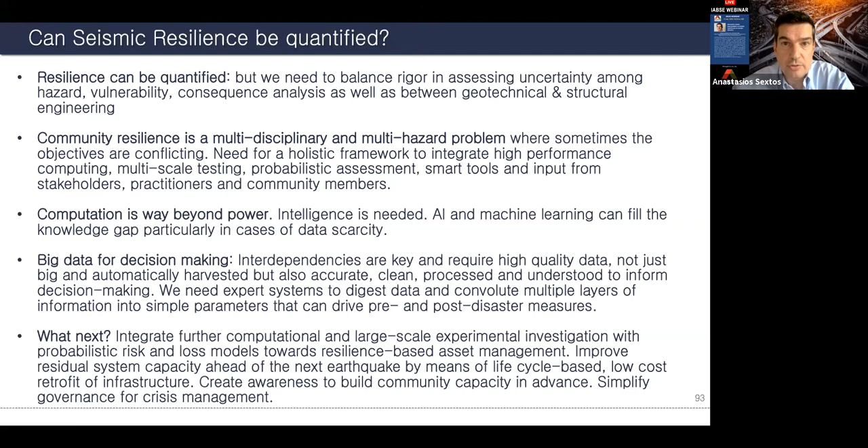So I'll take the questions one by one. First of all, by Maynard Oliver Gonzalez: what are the parameters you consider when you formulate your fragility curve?

Like I said, fragility curves have been here for many years, okay, there's nothing new in this. It's a way to quantify the uncertainty and predict the probability of exceeding a given damage state. Fragility curves can be very simplified by accounting only for ground motion uncertainty or some uncertainty in material properties. In our case, we take it to the extreme, if you like, because we want realistic ground motion. I gave you an example about spatially varying ground motions, realistic soil structure interaction, an example of how we deal with frequency and intensity dependent soil structure interaction. We try to be as realistic as possible by introducing multiple damage modes, different angles of incidence. So everything I've pretty much summarized in the second part of the presentation as challenges, this is what we aim to include in our fragility analysis.

Feel free, if you're not happy with the answer, to come back with a follow-up.

Then an extra question by Theodoros Chaveas, a very, very experienced colleague of us: how did you define cost of particular repairs for the specific motorway and bridges? This was provided by the stakeholder, and it is filtered through existing data from the literature.